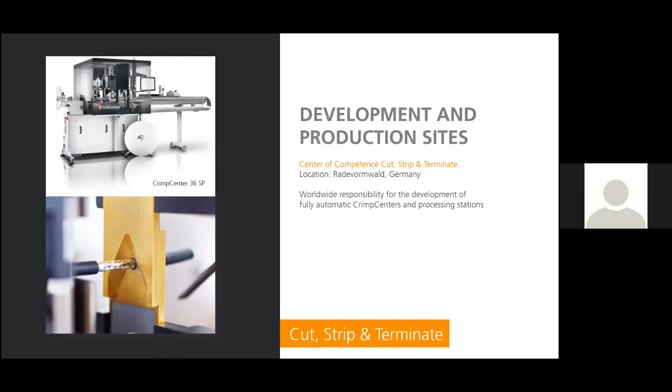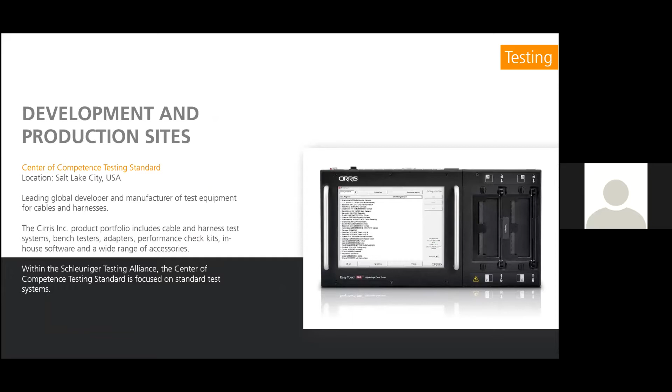We also have one factory in China, in Tianjin, where we are focused on wire harness assembly lines, plus pre and post equipment like pre-feeder, stacker, and coilers for our CoaxStrip machines.

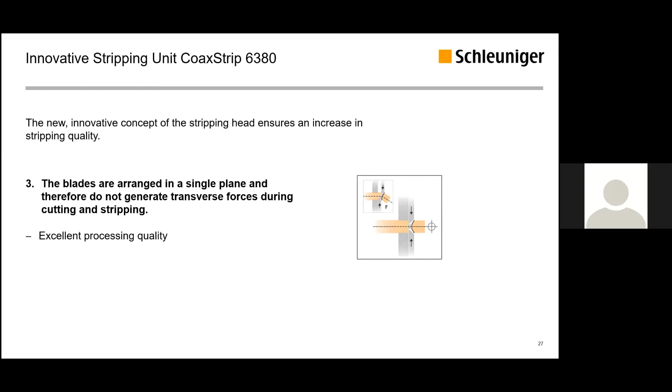On the 6480, we have a 3-blade system instead of the 2-blade system used in the former model. This gives better conditions for stripping thin and strong adhering insulation.

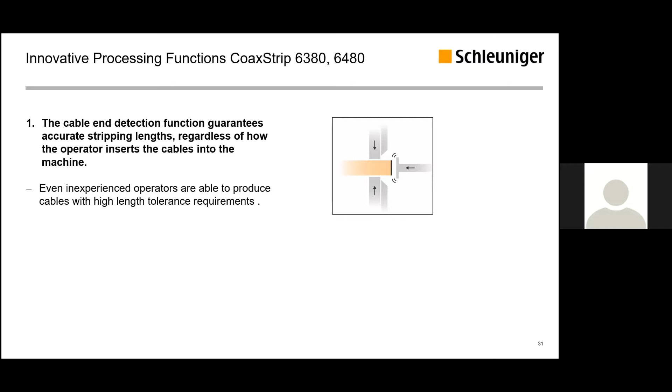We also have automatic cable retraction to help when inserting flexible cable and long strip lengths.

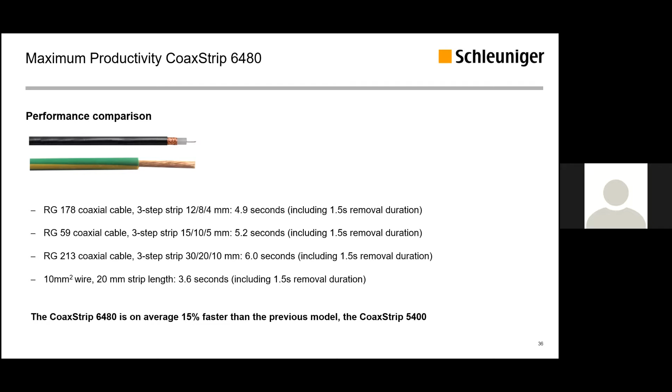On the 6480, we can also see that we are roughly 15% to 25% faster than the previous model, the CoaxStrip 5400.

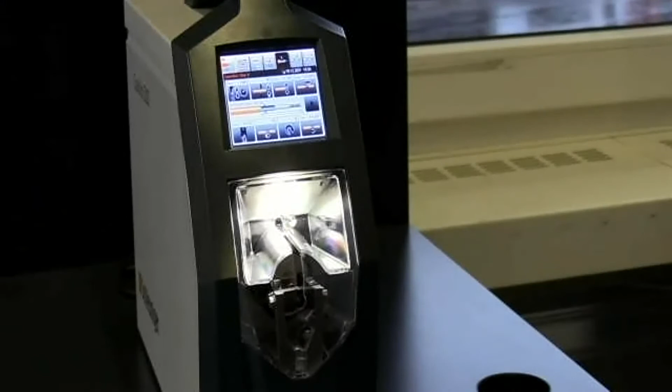So the machine can be programmed each step. It's very simple. You can program each step, each layer, and you can already test them if you have a proper result, to teach the machine the cable, to program the cable. So I did it for the outer jacket, and now I do it for the dielectric. So, if you see all layers are okay, just let me do the inner conductor.

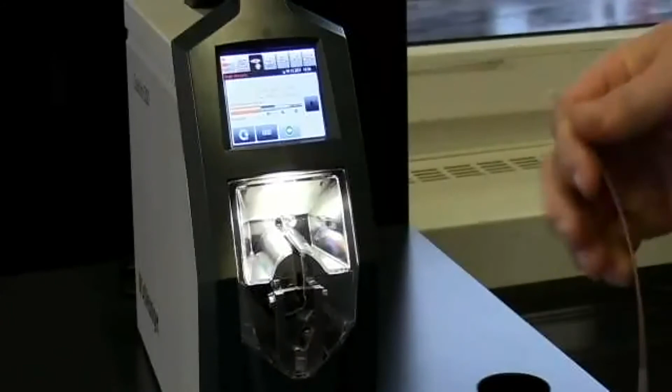You can start your program and process all 3 layers.

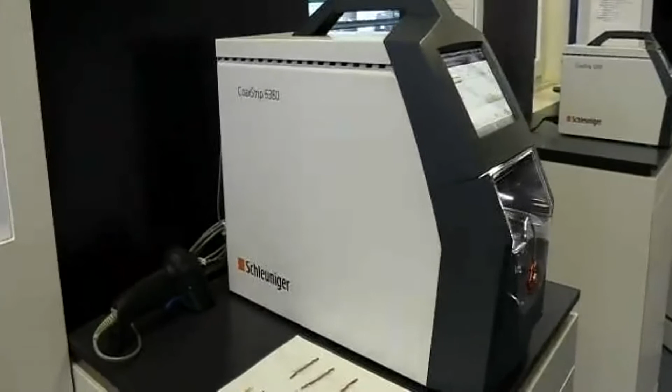Stefan explained it in the presentation before, and have a look on the features we implemented on our newest coaxial stripping machine. So the one machine you see here is the 6380, the smallest of the 3 machines. Here we are able to strip a maximum outer diameter of 8 mm and a maximum stripping length of 40 millimeters.

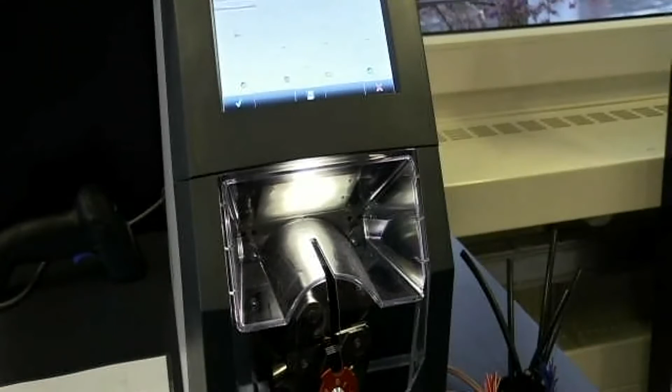First of all, here we have a very simple programming of the machine. The only thing you need is to have a data sheet where you have all the diameters, or you can simply measure your cable. You have a touch screen where you can program all settings of the machine.

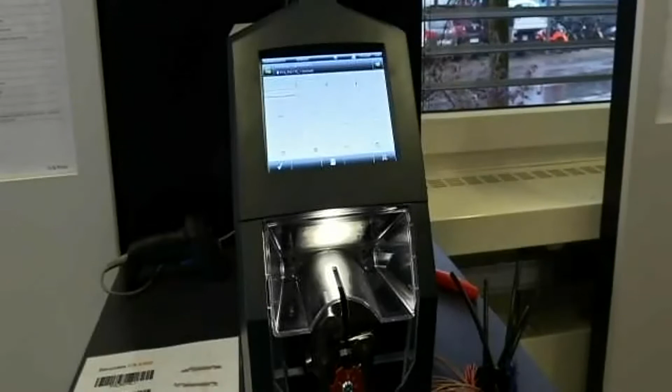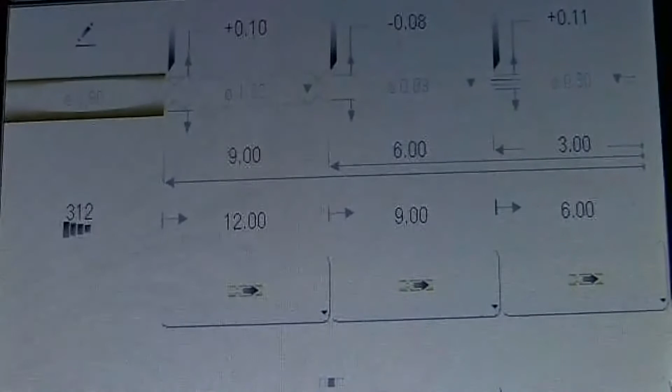Sorry Beat, I cannot see the screen, only white light. Okay, just give me a sec. Not so good quality. It's better. Where are you? It's better now. No, not so perfect. A little more better, but not so perfect. Now is better. A little bit of angle, if you make a little bit of angle, it's a little better. Okay, so let's try if we will get a good result.

So as I told, the program is very simple. You just need to have a data sheet, or you need to know the diameter of each layer.

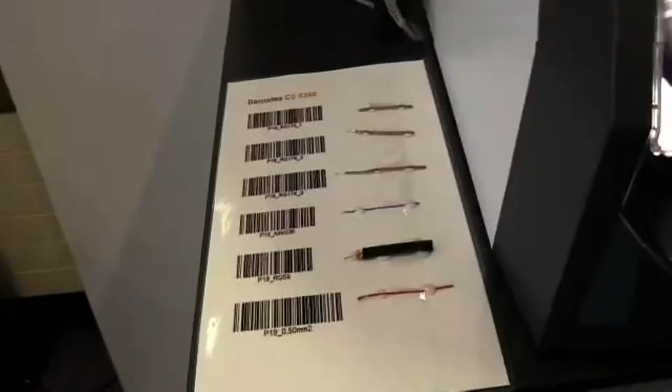You also can load your programming with the barcode scanner. So you can simply shoot your cable and you already have it in the machine ready for producing. So let me now focus on the newer generation, the features we have implemented on the machine, and I will go through each implemented feature.

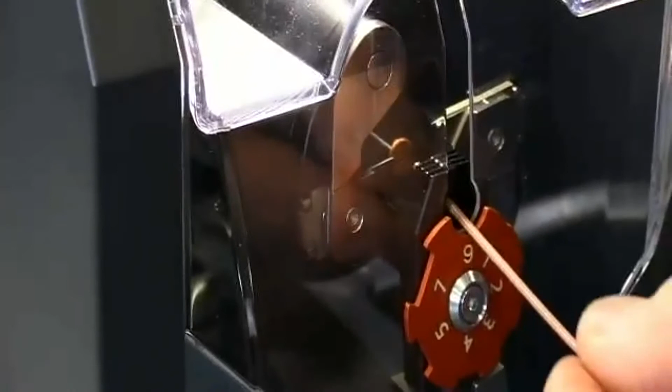Okay, now I will try to show you the fastness of the machine. I hope you can see it on the screen. So the machine is very fast.

That is something Stefan already mentioned in the presentation. I don't have it in mind exactly, but we are around 15% faster on this machine than on the machine models we have had in the past. That is one of the features.

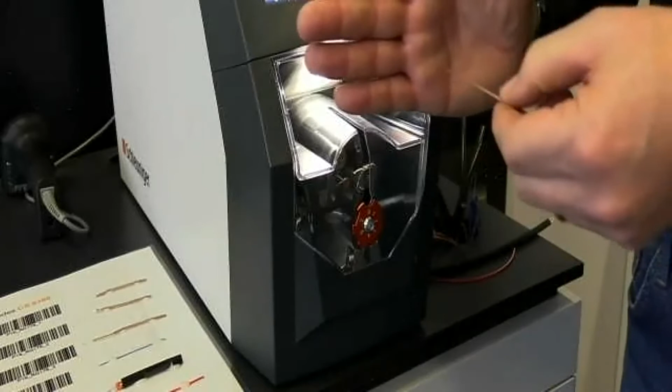Another one is the possibility to trigger the machine. Before we have only had a trigger. When you release the machine with the trigger, the machine starts. But the problem is if you have a very tall, strong man, he has a different power to release the trigger than let's say a small woman does, and this is a big difference. This can also have an influence on the precision of the length variation.

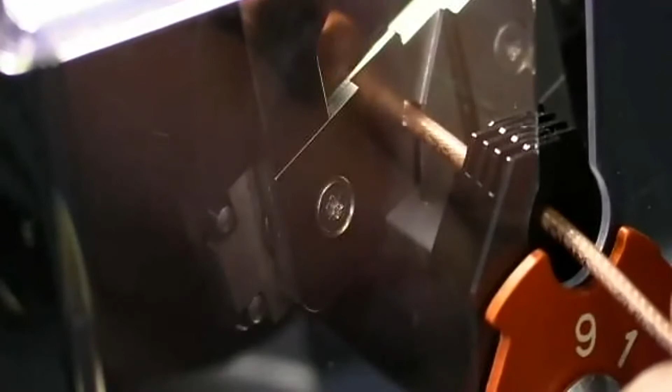So that's why we implemented a feature where we release the machine with the trigger. The trigger moves back and comes to the 0 point again with the defined speed and always with the same power. Let me try to show you that on the screen. So when I release the machine, it will release by the trigger, go back, and come again to the 0 point of the cable.

Beat, could you please repeat this process again? Okay. The problem is when we release the machine. No, for me only. Yes, start the process again. Okay, sorry.

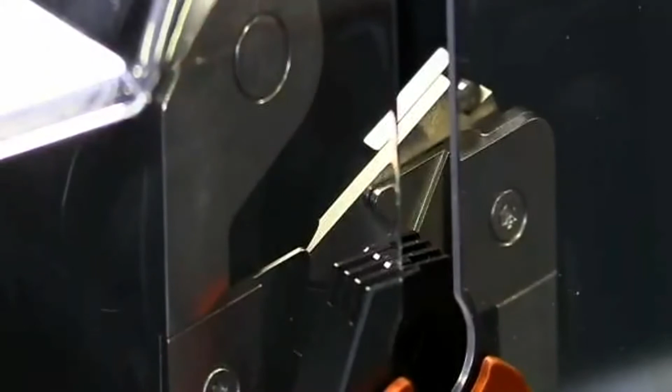So this was the new feature with the trigger release. Another one we have is when you have very long stripping lengths, there is a problem to start the machine. If the stripping length is very long, it's very difficult to find the trigger inside the machine. That's why we implemented a feature where we have a 0 point on the clamping jaws to start the machine. I will show you afterwards what the machine is doing.

So with the clamping jaws, we have the 0 point, and then we grab the cable and bring it to the requested stripping position for the stripping process, giving a good way to trigger the machine.

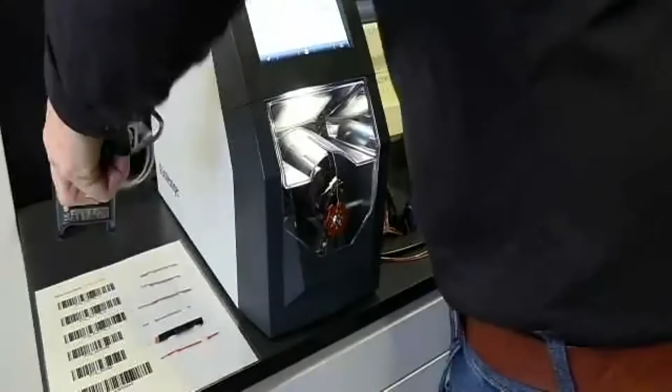So now we have AWG 36. It's a very small diameter. We can also process on this machine.

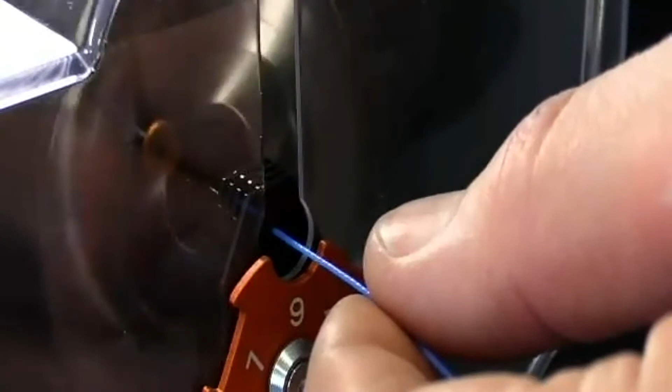Sergey, this cable has an outer diameter of 0.75. Which one?

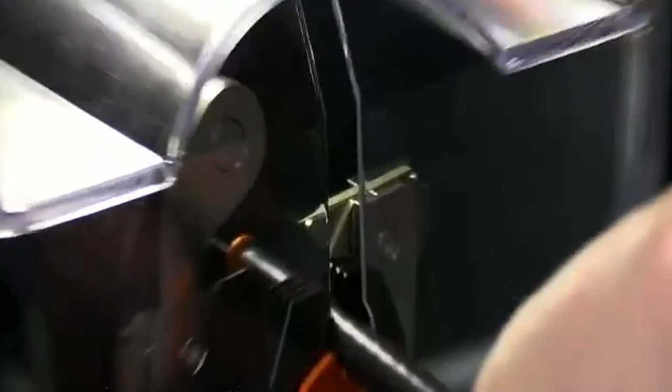If you have a cable like this, this is an RG59 cable, also a standard coaxial cable. When you process this cable, we have the possibility -- if by mistake the operator inserts the wrong cable -- the machine will automatically recognize it was a wrong diameter. The clamping will detect it's the wrong cable and display this information on the screen for the operator.

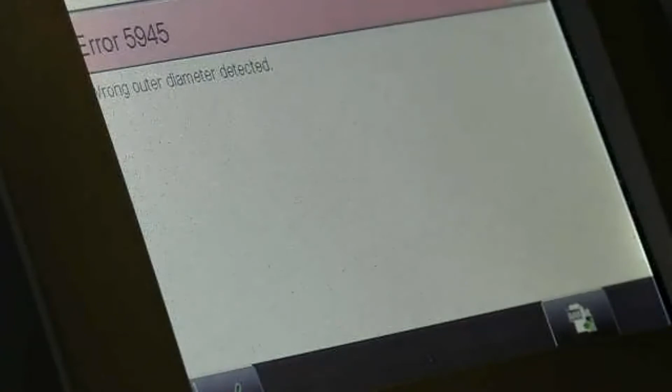Another feature we have implemented in this machine is the possibility to release the machine in different modes. That means we have the possibility to select a sample mode.

If you have ever tried to set up a coaxial cable, it's always difficult to see if the incision is too deep or not. Therefore, we implemented a sample mode to make more than one incision at a certain position. Let me show that on a sample on the machine.

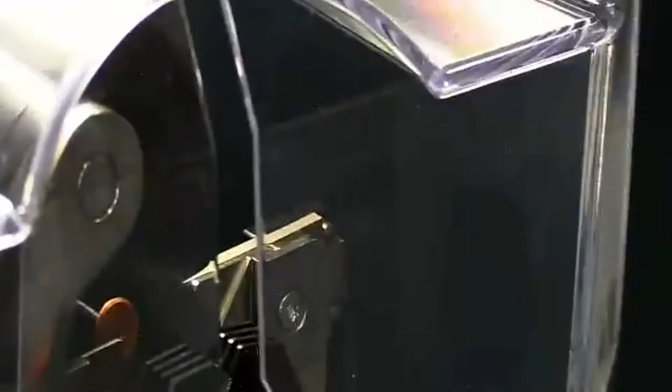Yes, okay, actually you can set this by yourself. That means you can teach the machine what the tolerances are. You have a plus tolerance and a minus tolerance for the cable, and you can select this yourself. It makes sense not to make it too sensitive, because of small variations from cable suppliers, so you don't always get an error message from the machine. But in general, you can set it by yourself.

Okay, for example, if I make the tolerance plus 1 millimeter and minus 0.2 millimeters, what about the accuracy for measurement?

Sorry, I didn't get that. So plus, I mean minus -- accuracy. I mean accuracy, maybe not tolerance, maybe accuracy.

For example... just one second, just one second.

Yes, accuracy of measurements. Okay, you can make very small steps. For example, here it's plus 1 millimeter, and on the minus tolerance it's 0.2 millimeters. That is what you mean, I guess.

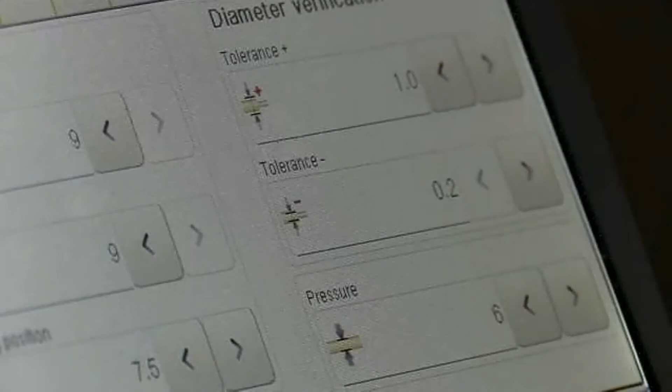Okay, we will discuss it with you a little bit later. Anton, okay.

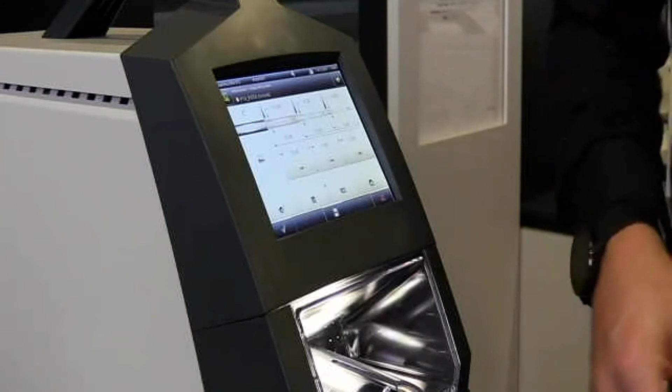No, Beat, I mean that when we start measurements on outer diameter, for each type of measurement we have accuracy of measurement. For example, if you measure 1 millimeter, every measurement tool has some variation. For example, which variation is there for measuring this cable?

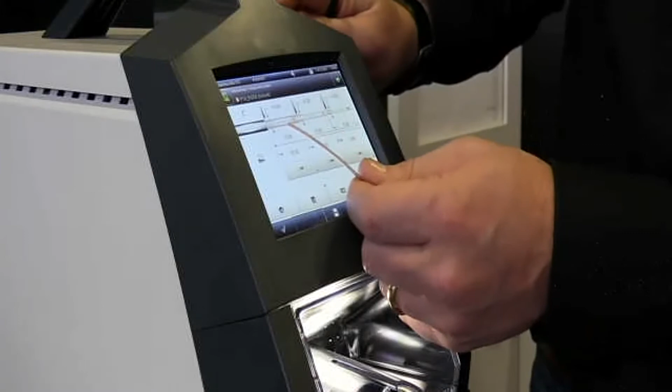Okay, next step. The next step I made is sample mode. That means when we produce the cable, we always make 2 incisions, so that the operator can check if the settings on the machine are correct or not. I hope you can see that on video. We make each incision 2 times, but with a certain incision position so you can check if you have gotten too deep or not deep enough.

I don't completely understand, please repeat. I'll try to explain it another way. When you program your cable, you program the machine to cut the shield, for example, or the inner conductor, and then you want to check under the microscope if you have gotten too deep. But it's very difficult to find the position because it's at the same cutting position as the incision, so it's really difficult to find.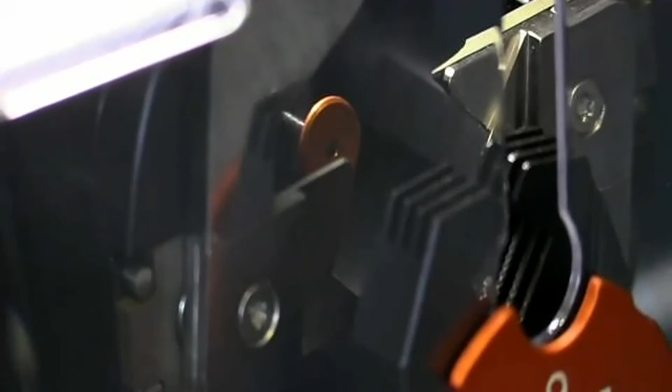But when you cut 1 millimeter in front with a first cut, then you can go to the microscope and check if you have like a small ring showing you've gotten too deep or not. It's just to make sure the operator has an easy way to prove or check the quality of the incision. It's just for the first time when you program a new cable.

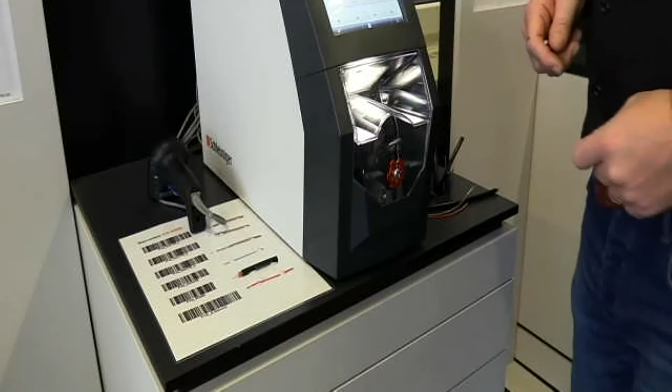If the problem of waste is bigger, or if there's a lot of waste, or if you're not able to clean it with a simple cleaning button, then you have the possibility to run this cleaning process. It's a guided process — the machine tells you on the display what you have to do. The next step is to simply remove the cover, take everything out, check if something's stuck between the clamping or the plate, and insert the cover again. Then you're ready to go.

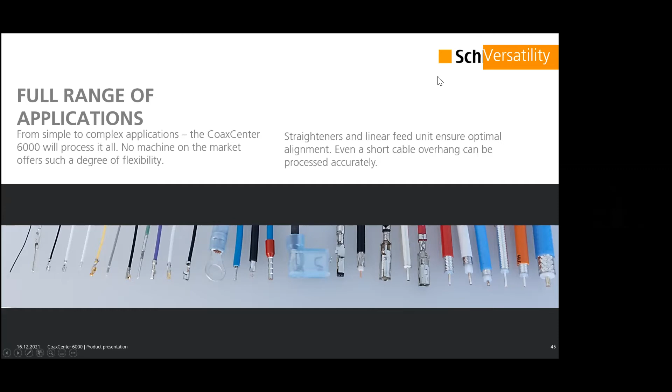In this machine we also have quality controls. We have a fully integrated 360 inspection camera, which will detect all the stripped ends 360 degrees to reject parts which are not good from a quality side. We also have inspection of the cable texture. We have a live display on the user screen during production, and we can also save the different pictures there. If you also work with crimp force monitoring, we can have that integrated inside the crimping press.

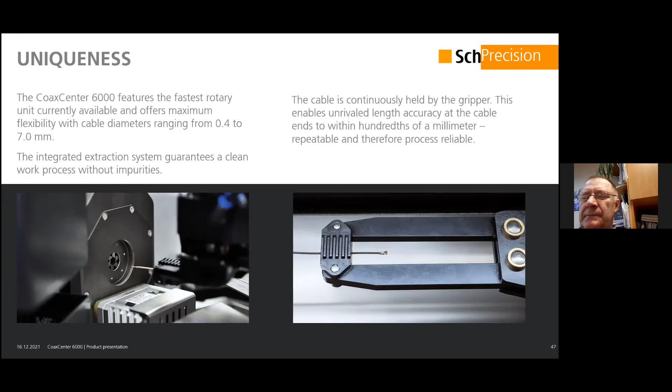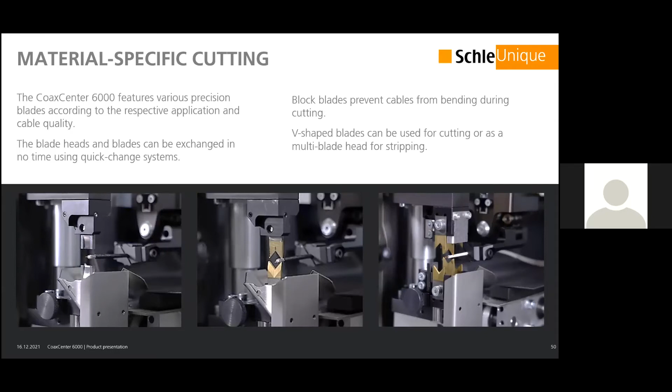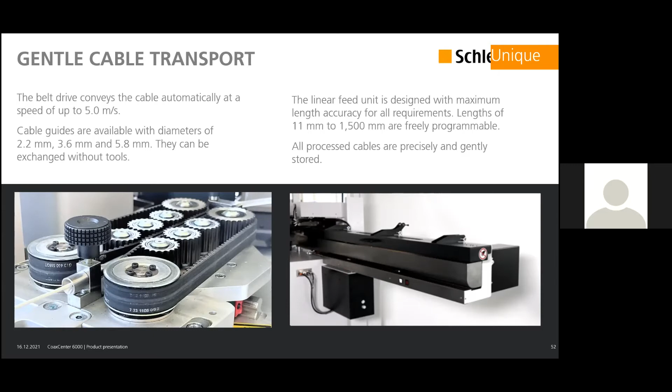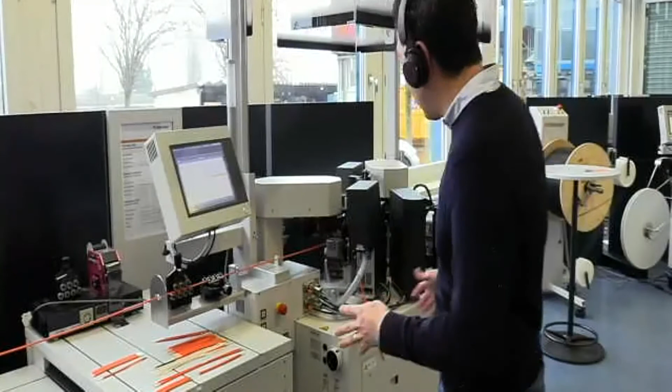We have two machines set up, and I think what I've seen is that you have already got some good information from Stefan, and with the good translation you have, I think you have a firm understanding of the machine. So it's really a compact machine. Again, 6 stations in total, 3 on each side. We have very compact modules with this quick-lock system where you can simply take them out—let me check this here, it's a little bit easier. You can slide out those stations, so it's easy to exchange them.

Okay, you have to wait, please. I will translate for my colleague. Okay, yes, sorry, because I must make the translation.

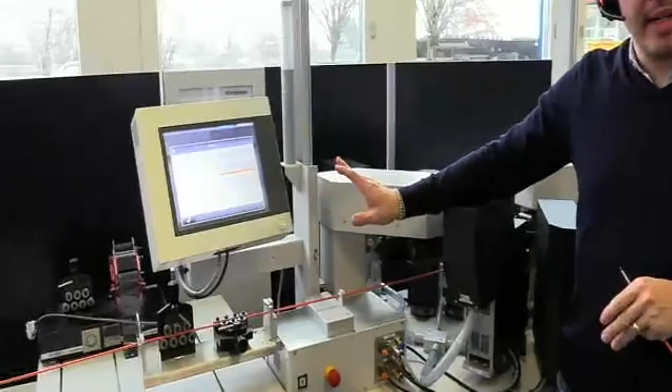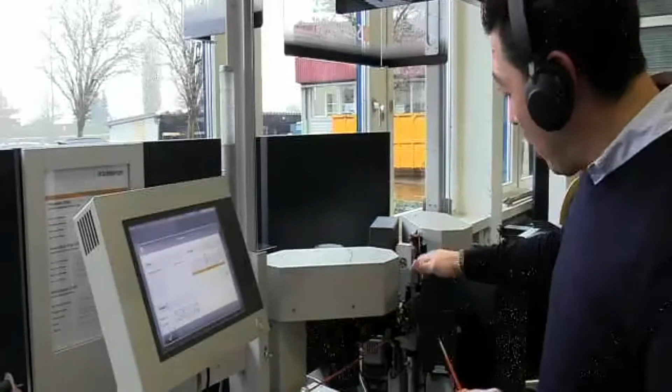Okay, continue. Here, this is the panel. It's very similar to S-on machines, or basically all the cut strip machines from Schleuniger, as well as the benchtop machines. They have all the same look and feel, and this is the same thing here. What we have here is an application I would like to show you: this conformable cable that's often used in high frequency transmission for data. What's very important here for these applications is the accuracy—the total length, the stripping length. We also have to make sure it's totally clean, and that's why we have this rotary unit with an integrated extraction unit, where we extract all the cut particles and bring them outside of the machine.

We also have... please wait. Yes? Wait, okay, sorry, wait. We have to get used to this. Wait, no problem.

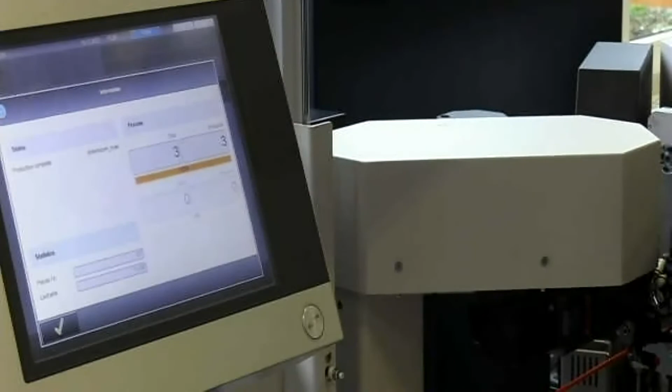Just one second, please, because we have one question. Юрий, добрый день. Хотелось бы узнать, какой у вас вопрос. Юрий, вы можете включить свой микрофон, чтобы задать вопрос, либо можете написать в чат, если это удобно. Юрий. Видимо, вопрос... Ну, Юрий, я думаю, задаст. Я вижу, что микрофон мог включить. Вопрос да, еще из чата. Это Алина Георгиевна, можешь озвучить.

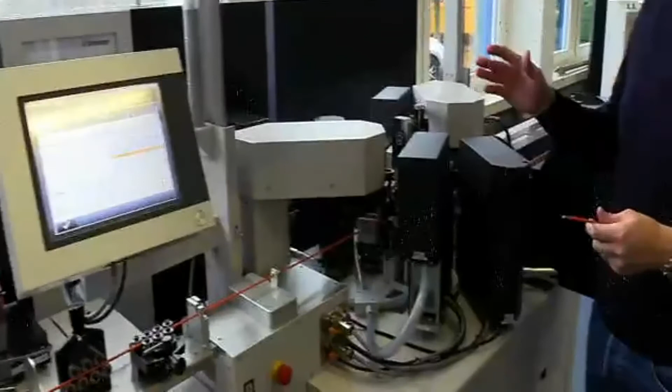Okay, Roger, continue. This is, as I said, this is what is physically also possible. In this particular case, for example, we combine multiple operations. One thing is we have this saw cut, so we don't cut the cable with V-blades. So we have a nice perpendicular cut. Also, the cut itself, the saw cut is sealed, so we don't have any cut particles. The machine remains clean. This is generally something very important, that the machine has to remain clean, and also ensures that you have minimum maintenance at the end. We bring all the cut particles outside. So also the saw cut is a very nice clean cut. That's one part we're doing here.

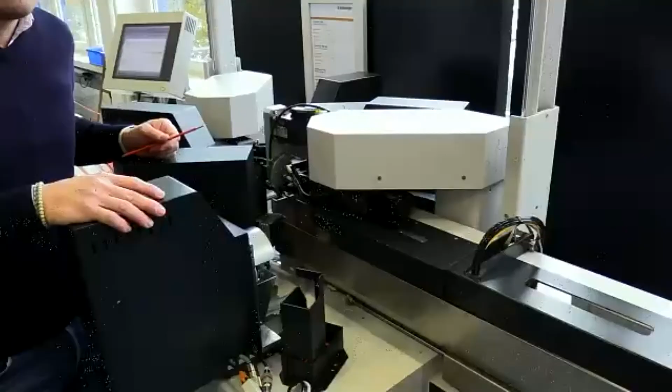Okay, continue. So we have the saw cut, the linear feeding unit, the rotary unit, the Q-cam. I think this has been also introduced. In this particular case, we can also make a 360-degree check. We can check the length. Sorry, yes, sorry, I lost the view. Cam not working. Yeah, I think yes, we have. Now I can see. Okay, so we have the Q-cam with a 360-degree inspection. We can check the diameter of each layer. We can also check if we have length. You know, the length accuracy is also checked. We can simply program it also. We can also check if we have any cut particles, specifically if you have cut braids, those little braid particles which can be on the dielectric. That's something we can also monitor and check. Then also what we have here, this is really ensuring that all the cables which have been processed are fully quality inspected. So all the wires which are finally in the tray, finished, processed, are basically monitored.

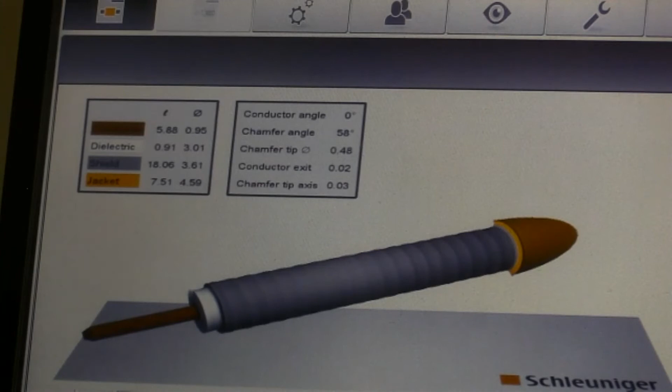Okay, continue. Okay, yeah, you see the screen. This is how we visualize all the different values which have been detected, and also if we have a bad piece, the system automatically will cut it off the end, reject it, and ensure that we really have only the good parts inside of the produced tray. So this is all about the QCam.

Also here, what we have is the pointing unit, because these cables often have to be pointed, and that's basically grinding off the edges from the tip. This just helps to simplify the insertion into a connector. The good thing about this unit...

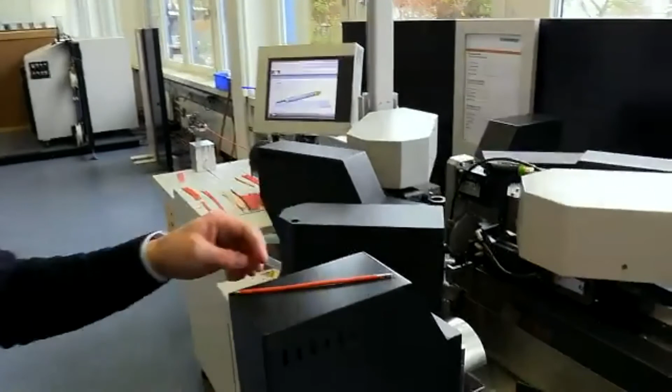Okay, so the good thing is also about the pointing unit, it's fully programmable. The tip angle, that means from 60 up to 110 degrees, is programmable over the software. And also, usually we do have a cover, we didn't have it covered so that you see the process.

I would like, maybe after you have done the translation, to run some samples here. You want me to run it so you can see? Maybe we can bring this to some angle so you can have a good view of the process.

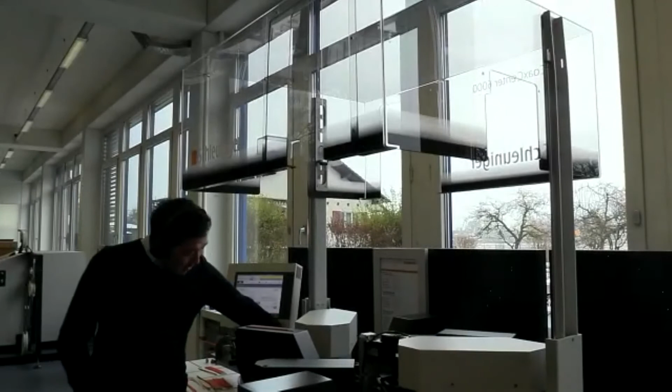The problem is if it's closed, you don't see anything here. I can show you this — this is how it used to look like. This is also how you would have to have it in operation in the facility. Okay, I understand, but I think this way it's very difficult to see because of the reflection.

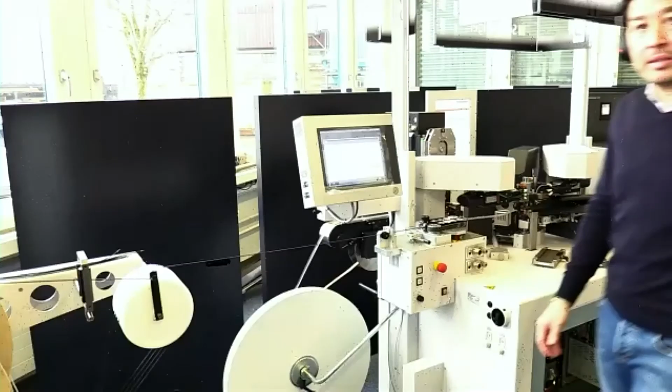Okay, what we have here is a complete line as an example, with a pre-feeder solution, the CoaxCenter 6000, and a wire stacker 3150 on the end to collect wires. This machine is actually a customer's machine. They are doing RG 174 coax cable. Their task was, they only want to strip one side.

So this is like a FAKRA application. What we are doing is cut the cable to length, strip only one side in this particular case, and then crimp the inner conductor. But this is another example — I hope you can see it a little bit.

Very bad, let's do it like this. No, wait. No. Yes, here we go. Perfect. Okay, this one is a...

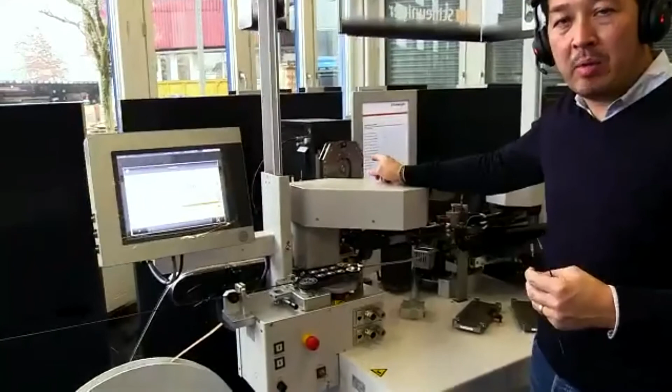But what's different here now is the CP150. This is a small, compact crimping press. I think we can go from this side where we can really have a better impression of the station. This is really a small compact 1-ton press. And what's special about this station is that we have a...

...parallel moving crimping press. That means the cable doesn't move, but the bottom part of the applicator and the top part will move together. So the cable doesn't move at all during the crimping process. Okay, maybe we will see how it works.

Вы можете обратить внимание, как сейчас происходит процесс обработки. То есть у нас происходит зачистка, контроль качества и дальше перемещение на обжатие.

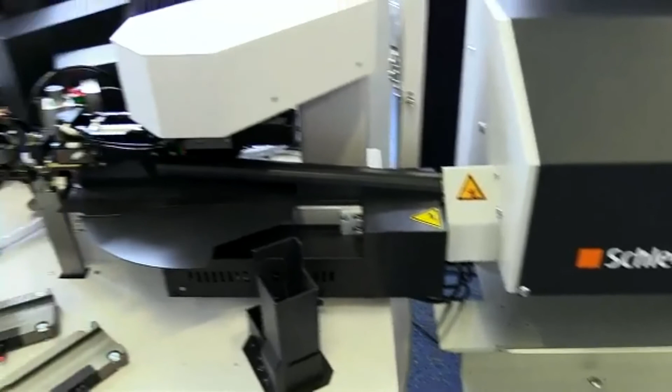Еще относительно конфигурации данной машины.

Здесь стоит привод для подачи, то есть вы можете обратить внимание на ременной привод, и к CoaxCenter подключен модуль для сборки готовой продукции. Это Wire Stacker 3150.

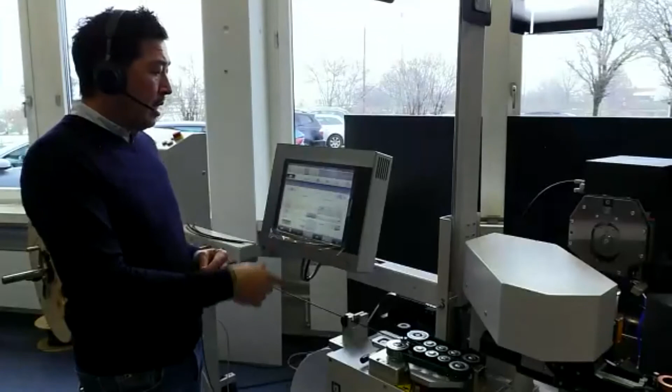This is now, I simply changed. We had like 100 millimeter long length just before. Usually we do it just to save a little bit of cable, but you can also see this is now just simply changing the length from 100 millimeter to 2 meter. And then you can just say, I want to have 100 pieces produced, and then it will automatically produce the cables, and always monitored.

So we do this, manual quality check is not necessary because the system automatically detects all faulty processed cables. So we also have the QCAM as a quality check, but also on the CP150 side, we have the CFM system integrated, which is monitoring the crimping process itself.

Машина обладает различными системами мониторинга качества. Одна из них – это Crimp Force Monitor, это контроль усилий обжатия. Он устанавливается в пресс. Также вы можете контролировать длину подачи провода.

Okay, continue. So this is just another example I wanted to show you. And also here, as an example, productivity for such a 2-meter cable, that's always a nice thing. Just 1 second.

Вот как раз ответ по вопросу количества штук в час. То есть здесь он производит примерно 830-900 штук в час.

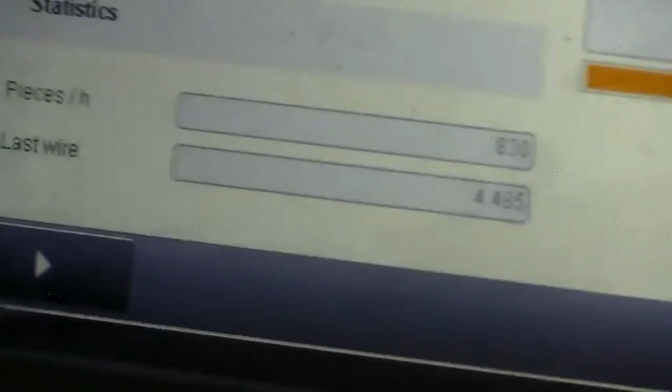So this is like for a 2-meter cable, basically a crimped and quality checked cable. Это для провода, для кабеля длиной 2 метра с обжатием с одной стороны и контролем качества.

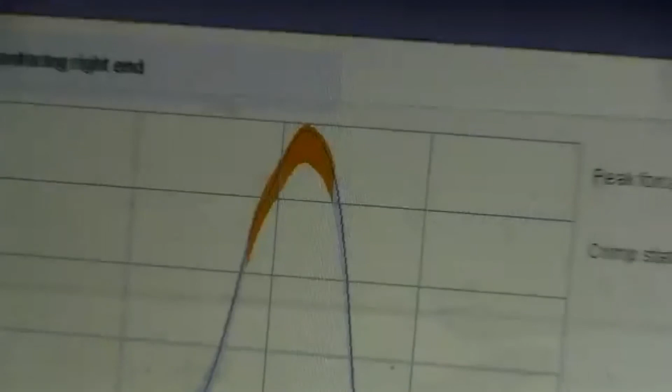Здесь вы можете обратить внимание на кривую, которая строится для усилия обжатия с максимальным усилием обжатия и, соответственно, кривая обжатия вам позволяет оценить ваш процесс по обжатию. То есть это недожатая оболочка, это отсутствует, например, жила при зачистке. Анализируя данную кривую, вы можете оценить ваш процесс, его стабильность.

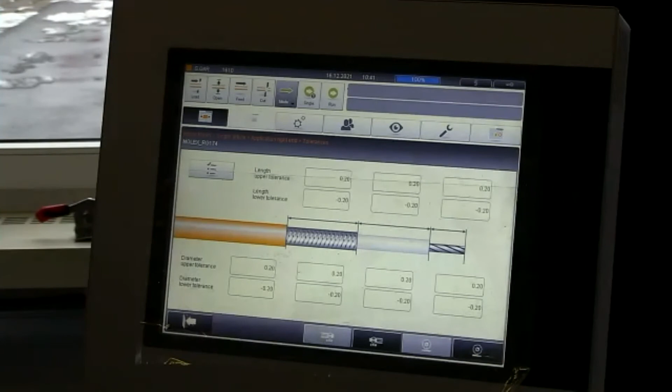Yeah, maybe just quick set up the QCAM, yes? Сейчас вы можете создавать параметры по настройке QCAM.

Okay, continue. So this is just, it's very simple. So you don't need to have specific know-how regarding quality inspections unit to set up. It's just typing in what you want to have. You know exactly what stripping length of each layer, and then you just set up the tolerances accordingly. So it's a very simple task here.

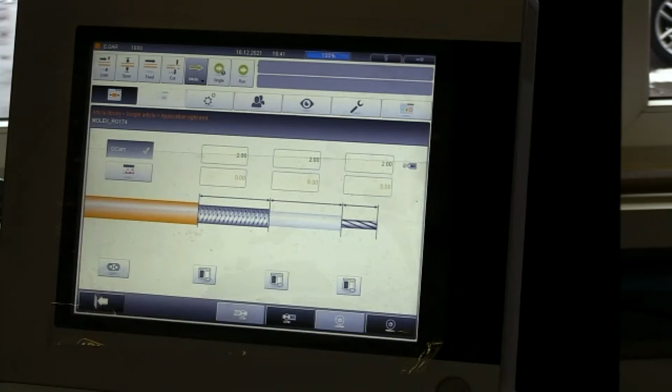Здесь вы можете задать длину по зачистке каждого слоя, что достаточно просто и не требует каких-либо особых навыков и знаний.

Yes. And this is basically what we wanted to show you quickly. This is just 2 possible configurations of a machine, how you can set up. There are surely also other modules available.

The good thing is also we do have a robotic interface. So sometimes if you might have a station or a module which fits physically onto this station, onto this machine platform, we could, for example, also operate it with a robotic interface option. Simple I/O signals we can provide in order to use this equipment in conjunction with your system. So this is what we have. So that makes this product or this machine solution very attractive, very flexible, and open for any type of applications.

В данной демонстрации они показали 2 разных варианта конфигурации машины, которую достаточно легко и просто сконфигурировать под ваши задачи.

Roger, I have a small question. Could you say to me, for example, I bought this machine in one type of configuration, for example, 1 crimp station and 1 V-blade cutting unit. Can I upgrade this machine by myself or not?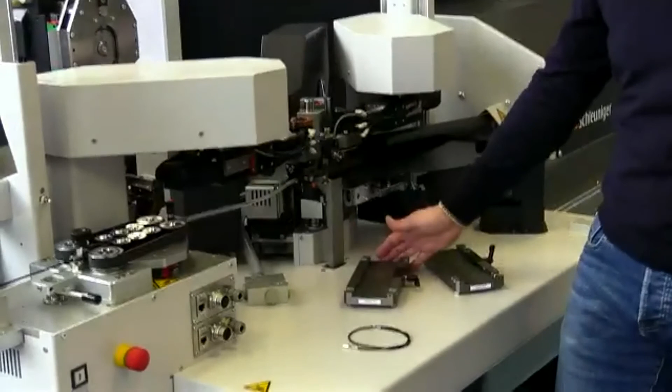You can do it by yourself. That's the good thing about this, that you can say, okay, I start with a simple configuration, and maybe later on I would like to have a rotary unit, for example. And that's the nice thing about it. You can buy those rotary units, slide it onto the station here, insert it. This is always the same interface port.

So basically all the devices we have this quick lock system here. So you can simply exchange it, insert a new module. As soon as you have attached it to the system, it automatically recognizes a new configuration, and you're basically ready to start.

Okay, understand. Одно из преимуществ данной машины, вы можете приобрести в какой-то определенной конфигурации, которая вам необходима на текущий момент, и в будущем вы ее можете дооснастить и реконфигурировать уже самостоятельно, докупив необходимые вам модули.

Например, вы можете в будущем поставить модуль либо роторной зачистки, либо, например, поставить модуль для распила провода, то есть модуль пилы.